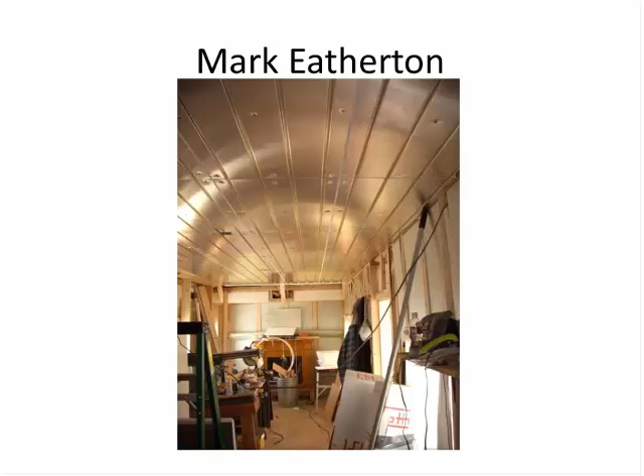Here's a radiant ceiling system that I installed on my own house up in the mountains. This is part of actually getting the tubing installed, and as you can see, it's in a state of disarray, which is typical for a construction site.

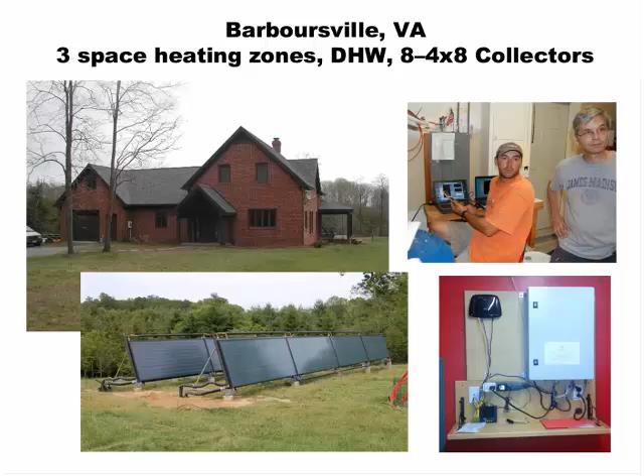We're focusing on smaller buildings because big buildings have had energy management systems available to them for decades. But small buildings have not. Small buildings have sort of missed the energy management revolution. And so we started Solar Logic with the idea that any hydronically heated house could have solar and could have an intelligent energy management system added to it.

And when you have a standard plumbing system, what you find is that you have the ability to control it in a standard way. And so again, with what we provide as far as the technology, the SLIC controller in particular, we don't customize that piece of equipment for your job. We don't do any original programming for every system that we send out. It arrives ready to plug and play, and that's because we do things the same way.

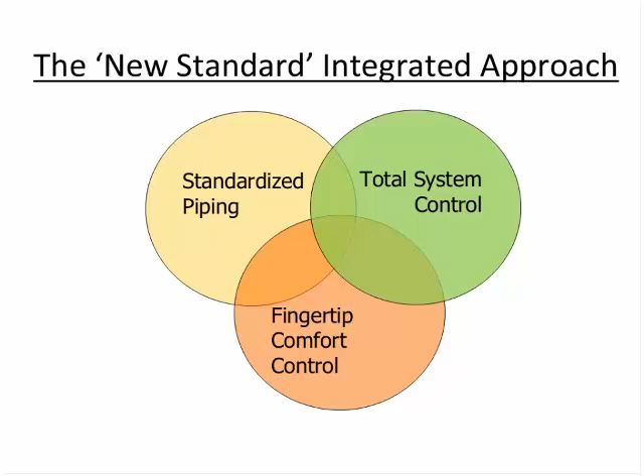First of all, the standard plumbing that we have landed upon. I standardized it for myself and my own work over 15 years ago, I guess. I standardized on always using a primary loop or some kind of hydraulic flow separator. And I've tried both, primary loops and flow separators, and I've decided that for better control and better monitoring, the primary loop actually works better.

So almost always we use a primary loop instead of a flow separator. The primary loop provides the flow separation, but it also provides temperature staging where you can put different temperatures in order along the flow path of the primary loop. So for instance, the solar collectors can, through this heat exchanger, feed a storage tank, which can feed a boiler, and so the temperature goes up and up as you go down the flow path of the primary loop. So you have this rising temperature order for the heat sources, and then you have diminishing temperature order for the heat loads.

So the first heat load we almost always have right next to the boiler on the primary loop where the boiler fluid is the hottest is the domestic hot water tank, so that you can have fast recovery for showers to prevent the occupants from complaining. You always want to do fast recovery for showers at the hottest temperature.

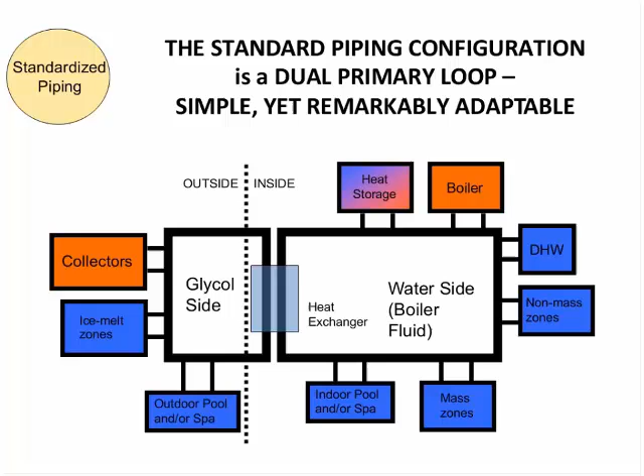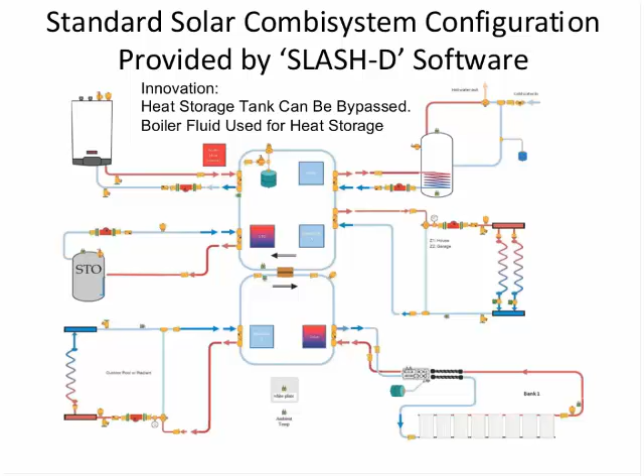So that's how you do the plumbing. That's what we call standardized plumbing, and we make it really easy by giving you free software to help you do it. I'm going to try to advance to the next slide here.

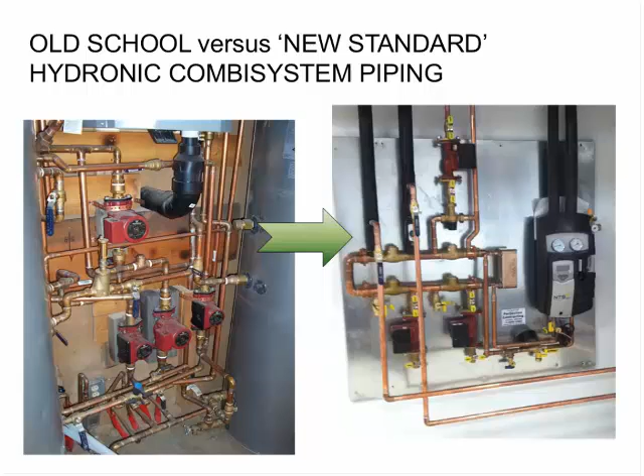And if you do that, then you can control it in a very neat way, and you can guarantee the control is going to work right. So here's the control part of it.

Our controller, we call it the SLIC. It's the Solar Logic Integrated Controller. And we invented it from the ground up starting about 6 years ago. What we did is we took every control item that's usually in a hydronic boiler room and we put it into one box and put all that stuff under computer control in the one box.

So all the wires from the heating system come in through the bottom and connect to screw terminals on the bottom of this box, including the circulator pumps, the motorized zone valves, the end switches, the temperature sensors, which are typically 10K thermistors. All the room thermostats connect to this box. And because everything in the heating system, all the sensors and all the pumps and all the zone valves and all the switches are connected to the box, that means that the computer can see their state.

The computer can see, is the pump on or off? What temperature is the sensor telling me? What is the room thermostat calling for or not calling for? Everything about the heating system is processed by the computer, and then the computer has this intelligent software that decides what to do. If there's free heat, we'll find something that needs free heat and send it there. And if there's auxiliary heat, we'll wait a little bit until the temperature drops a little, and then, okay, we'll fire the auxiliary heat as a last resort.

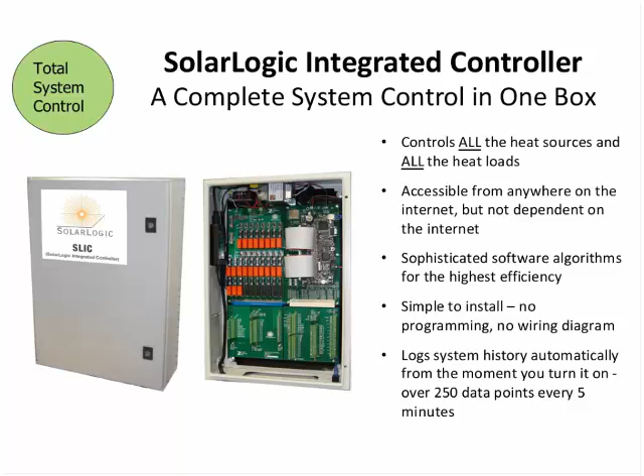All of those intelligent functions are built into the control system. And there's more functions than you can even imagine built into that software. And I'll get into that a little bit later on a later slide.

And our philosophy is that good hydronic plumbing is useless without good controls, and that photo of old school proves the point. Even if you're a good plumber, you can put together plumbing, but if you don't have a control strategy that goes with it, then the plumbing's out of control and it's useless. So we always design the plumbing and the control together, side by side. And our second control philosophy is that the plumbing and controls must be thought of as two sides of the same coin, if you will.

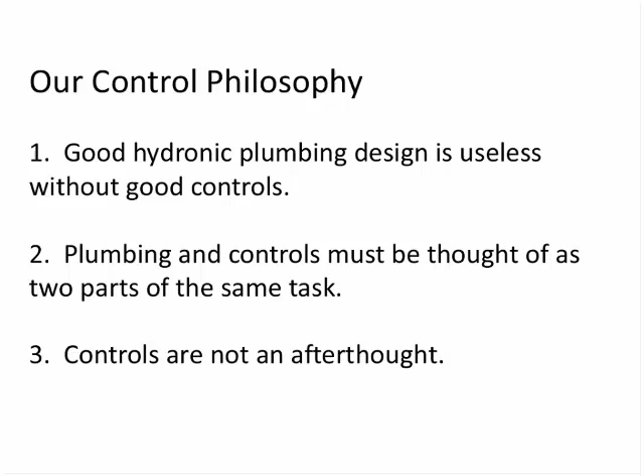And number 3, controls are not an afterthought. Even if you're a good plumber, it's a bad idea to create a complex alternative energy plumbing system, thinking that you'll figure out the controls later as an afterthought. That never works very well.

So if you do standardized plumbing, you can do standardized control. And we have standardized our plumbing and made it simpler by using a primary loop, and we've standardized our control and made it simpler by using a computer and circuit boards rather than the hand wiring that we used to do.

This is one of my really old solar heating controls that I put in a famous movie star's house here in Santa Fe about 10 or 12 years ago. And you can see that there's hundreds and hundreds of hand wiring that is done. Wiring relays together, wiring solar controls and set point controls, and other things, time delays and what have you. In order to get all those intelligent functions, we used to do it manually with wiring and individual controls.

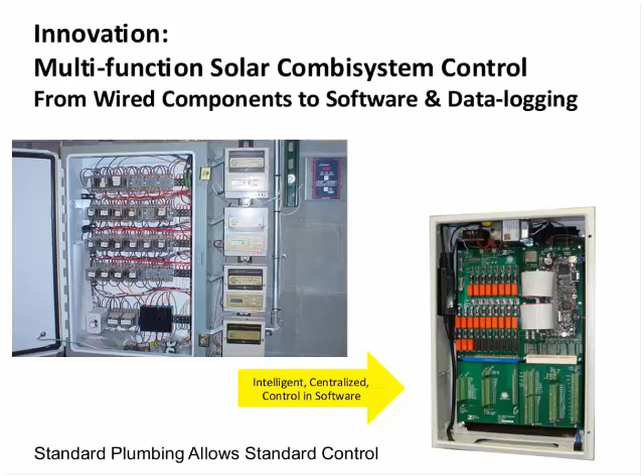And now we built all that intelligence into the computer software. So now it's all done with software. And there's essentially no hand wiring of the internal controls in the box. The only hand wiring is connecting each device to the controller one by one. Each pump gets wired to the control box, each zone valve and each end switch and so forth. So all the wiring is home run to the box. Every device has a place to go, and you put it there in the box.

So here's kind of an overall list. If you listed all the functions that are built into the SLIC controller in its software, it would be many hundreds of functions. But this is the big picture. We do two-stage controlling of almost every temperature in the system. What that means is that every heating load that needs to be heated can have two set points, a little higher when the heat is free and a little lower when the heat's not free. And that's called two-stage thermostat control.

And every device in the standard heating system that we do has at least two stages, so that we can bump it up and store heat by raising the temperature when the heat is free, and reducing the conventional fuel when the heat's not free. Solar and backup for domestic hot water, that's the kind of function that you get from a typical differential thermostat.

We have the equivalent of many differential thermostats built into our software. Solar heat storage in water tanks or in mass floors. Well, most old school solar heating systems had water tanks, but almost no old school solar heating systems even considered the mass of the concrete floors as a storage medium.

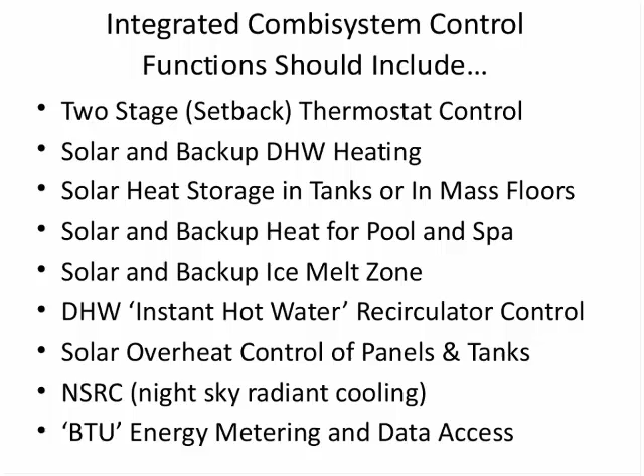And also BTU energy measuring, we measure all the BTUs going into the building from every heat source, and we display it as part of our dashboard display of our control system. And then, of course, the last part of this, Claudia already mentioned, is that for the homeowners or the people who live in the house who are not computer people, you don't have to go to the computer to run the system. You just have to go to the thermostat, turn it up and down.

And then also our thermostats have a few extra functions like a solar-only switch so that you can just not heat the room with anything but solar if you want to, and an auxiliary switch which gives more priority to holding the temperature at a constant level. Say if you have an elderly guest or a sick child or something, you might want to hold the temperature in the room much more constant, and so you use the auxiliary switch to do that.

But the normal function switch on this room thermostat allows the controller to decide the optimum balance between heating the room up to the comfort target temperature or not, or how close to the comfort target temperature it will allow it to go without burning extra conventional fuel.

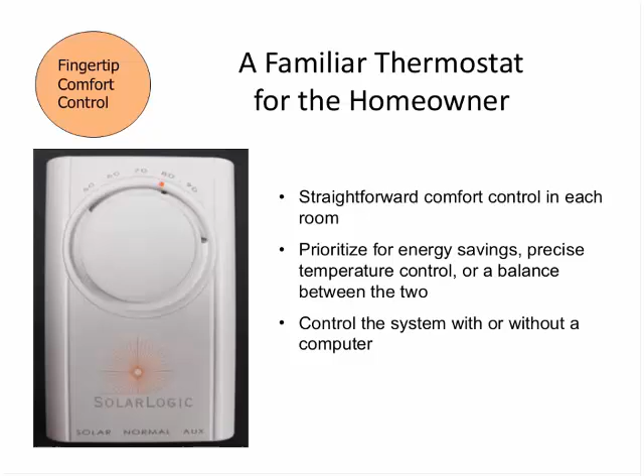And then in the house, the computers that are connected to that network can view the control system as a kind of a dashboard. So you can actually drive the heating system through your computer, kind of like driving a car. But then also the home local area network is often connected to the internet, to the outside, through what we call cyberspace. And when it's connected to the internet, anyone with the right software and the right passwords can also look in on this heating system.

So the installer might want to have the password for a system he installed, and from his office he can check it and make sure it's working right, and do diagnostics and adjustments. And of course, we at Solar Logic do this all the time with all of our systems. We kind of watch over them, and especially when the owner or the installer calls us with questions, we'll go and look at it by remote control over the internet.

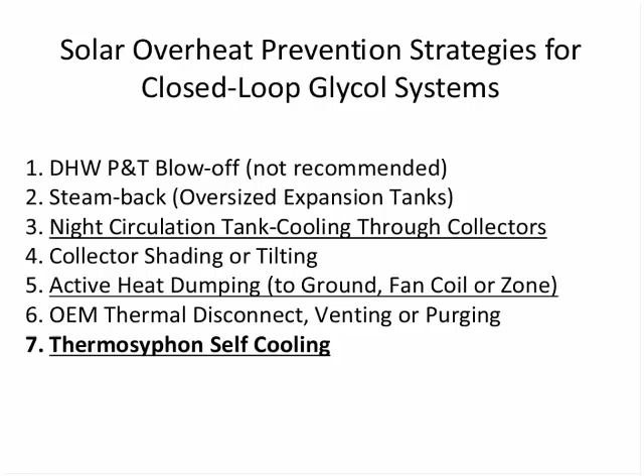You take your collectors and you add cooling fins to the back by connecting them at one corner of your collector array. The corner that's usually capped off, the cap is removed, and the top of the collector has a cooling fin attached to it, and that cooling fin drops behind the collectors at a slight tilt and comes down and connects to the other end of the collectors, where you usually have a cap, through a swing check valve. So let me show you the back of the collectors to make this easier to visualize.

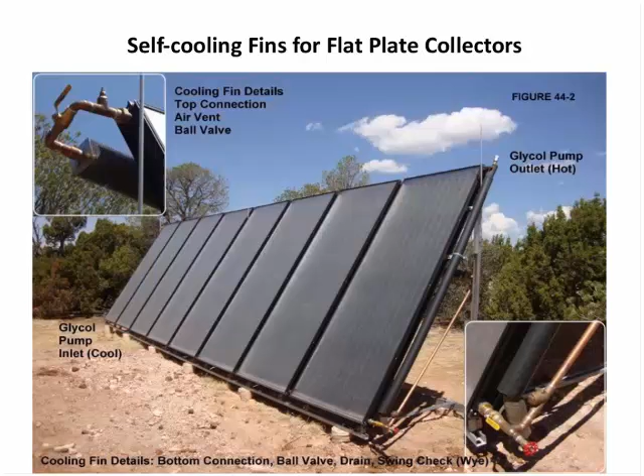You see the fins come off the top of the collector bank and drop down at a tilt downhill all the way to the bottom of the collectors. So when you have a power failure, I'll go back to this, the pump stops, and the pump that was pumping fluid from the bottom of these collectors up and out the right-hand top corner, the pressure from that pump was holding this swing check valve shut.

So there was no flow through the fins while the pump is on. But then when the pump fails or has a power failure, the heat building up in these collectors causes the fluid to rise, because hot fluid is less dense and rises, and so it rises to the top header, and it can't find its way out the right-hand side because the pump's kind of in the way there. So it finds its way out the path of least resistance, which is out the other corner through the fins.

And in the fins is cool fluid, and as hot fluid slides in the top, as it rises and comes in the top, the cold fluid slides downhill and back into the bottom of the collectors. And so that's known as thermosiphoning. The flow from the hot collectors to the cool fins and around is driven by the heat from the sun. It's known as a thermosiphoning cooling loop.

And we use this these days on every system. Just about every system we put in for the last 3 years has had thermosiphoning cooling loops, because it keeps the glycol from boiling during a power failure, and it keeps it cool so that it doesn't wear out prematurely and become too acidic too quickly. And so everything lasts longer and everything stays cooler, and that makes solar heating more reliable. In fact, it makes it 100% reliable if you do it right.

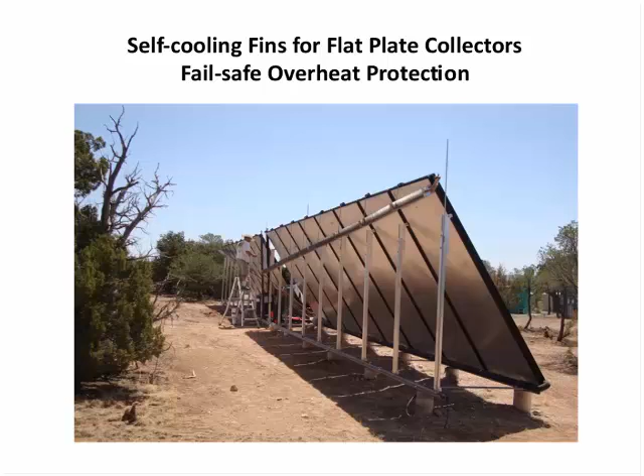So this isn't something that we're experimenting with, and it's not theoretical. We actually do it and it works, and we monitor it and make sure it works. And we can help anybody who's doing solar heating mimic this installation of the cooling fins, because it's not patented or anything. Anybody can do it.

Now let's talk about night sky radiant cooling. The way night sky radiant cooling works is when you put a plate of metal, and here's a plate of metal, for instance, like the license plate of a car or the metal top of your car, and it's clear out at night, even in the summer, what happens is that the night sky becomes a very, very cold heat sink. The equivalent temperature of a dark night sky is 100 degrees below 0 Fahrenheit. I mean, outer space is very cold.

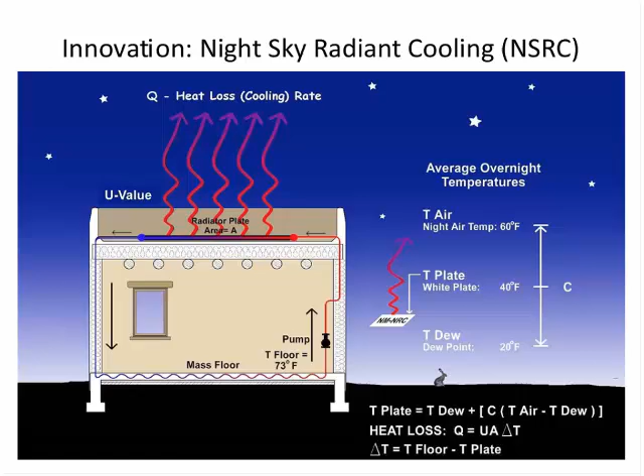And for the price of running a circulator pump, the coefficient of performance for cooling is outrageously high. So that's why we do it. It's economically viable, it's technically viable, and it's just ordinary equipment being used in a different way under cooling control instead of heating control. So let me continue on here.

And then just to prove that you can predict how much cooling will happen in different climates, there is a formula back here on this page. There's a formula here where you can look at the dew point in the weather records at night and the typical air temperature outdoors and the typical air temperature indoors, or that's the fluid temperature indoors. Anyway, with just temperatures and a quick calculation, you can estimate how much cooling you're going to get in almost any climate if you look at the dew point and air temperature records.

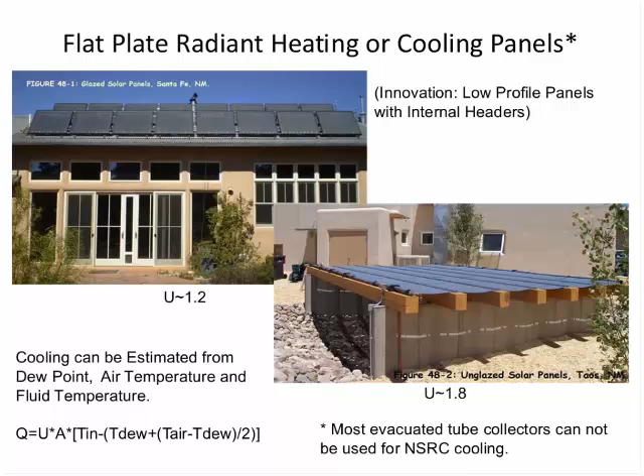They just don't work in Miami, Florida in the middle of summer. Oh, and by the way, you can get plenty of cooling in spring and fall and winter from these flat plate collectors by running them at night.

And that's not such a far-fetched idea if you have a commercial building that needs to be cooled even in the spring and fall, or even in winter some commercial buildings need to be cooled. So it's a source of almost free cooling, and you can use these formulas and some weather data to figure out how much cooling you can get month by month. And pretty much anywhere in the United States, except the most hot and humid places, it does work.

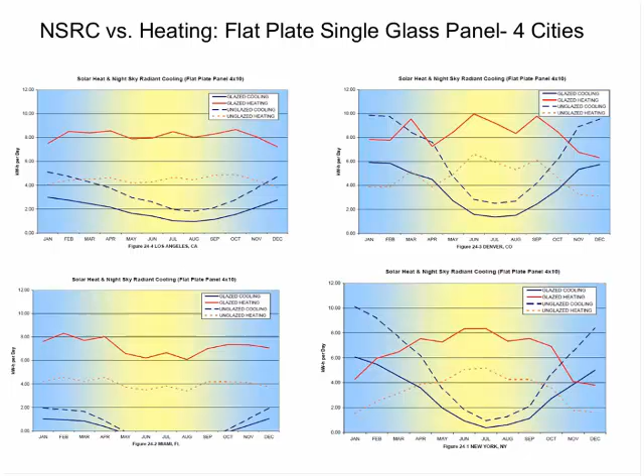So moving right along, here's 6 things that if you're thinking about radiant night sky cooling, you should probably realize. It doesn't work like an air conditioner. It's more like an economizer cycle where you turn it on when you can do it and you turn it off when you can't do it. So it's not on demand like an air conditioner. And that's the most important thing to keep in mind.

It's solar heat in reverse is really what it's like. I mean, when solar is there, you take it and you store it or something. And when radiant cooling is there, you take it and try to store it or use it directly. So it's kind of like solar energy, but it's for cooling. But there's real efficiency advantages. That's the bottom line here.

You can use it anywhere in the United States where the humidity isn't terribly high in summer, and it's got real efficiency advantages. And I've actually figured out the coefficient of performance for some of the radiant night sky cooling systems we have out in the field, and they vary anywhere from a coefficient of performance of like 15 up to 50.

And when you think of a ground source heat pump having a typical coefficient of performance of 3, well, we're doing way better than 3 with radiant night sky cooling. We're doing at least a 13 or a 15, if not better, for coefficient of performance.

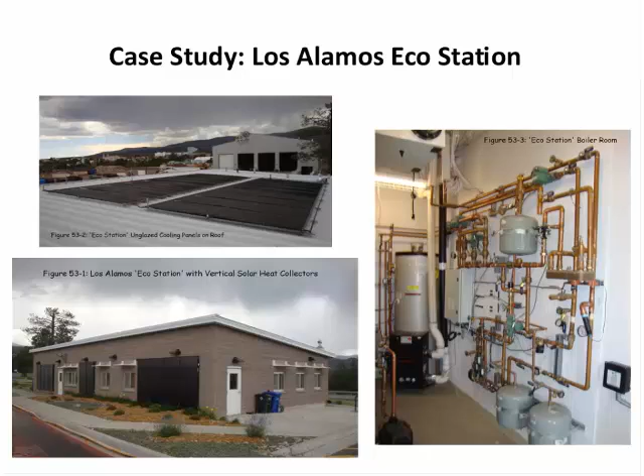And then, of course, we do have actual installations that we monitor and study. And the Los Alamos Eco Station is one of those facilities where they have significant radiant night sky cooling panels. They're quite large, and so they can get a lot of cooling out of them. And now that we have an intelligent control system there, we can watch it over the internet. And this is what happens.

Oh, okay, thank you, Claudia. Yeah, I've been pointing at things with the cursor on my mouse, and apparently you cannot see that, so I'm sorry about that.

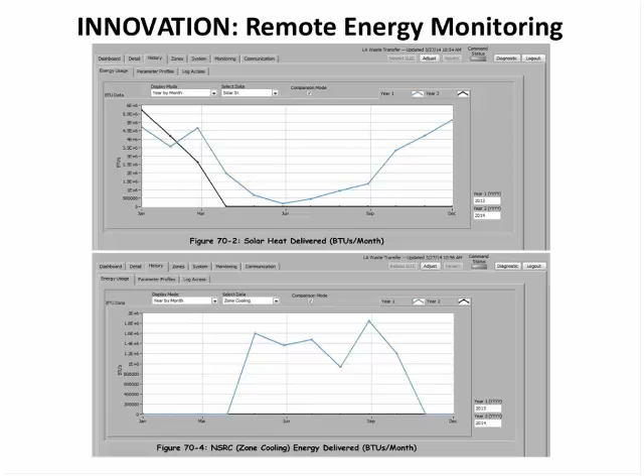So let's just talk about other ways of using this technology that I just described to you. The standard solar hydronic heating system with standard intelligent controls can also be used not just for solar, but for any kind of heat. Any heat that you can use to make hot water and put into your hydronic heating system, we can control it. So here's some examples, and again, this is what we do. I'm not talking theory. We actually do this.

Whenever the heat's there, you use it, and the intelligent control system figures out where to put it, either to store it or to put it in the concrete floors. Or in this case, in Colorado, this is a fish farm, so we put the heat into the 3,000-gallon fish tanks where they're raising fish.

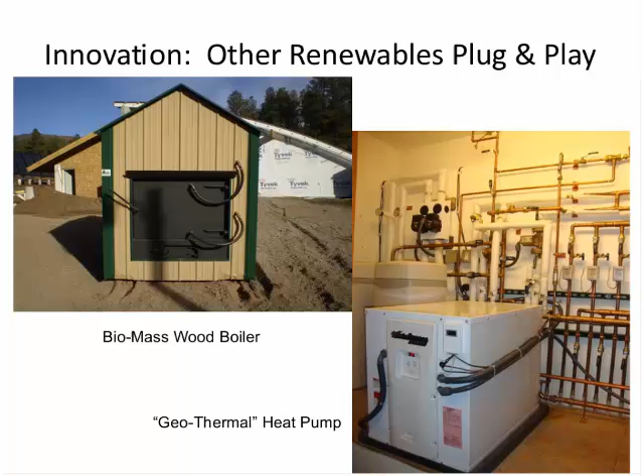So whenever the engine runs, we treat it kind of like it's a solar collector. It's free heat. It's running anyway. It's making heat. So then we tap off the heat and send it around the primary loop, and the intelligent control system just sends it to somewhere it can be used. And this improves the fuel efficiency of an engine generator by a factor of 3.

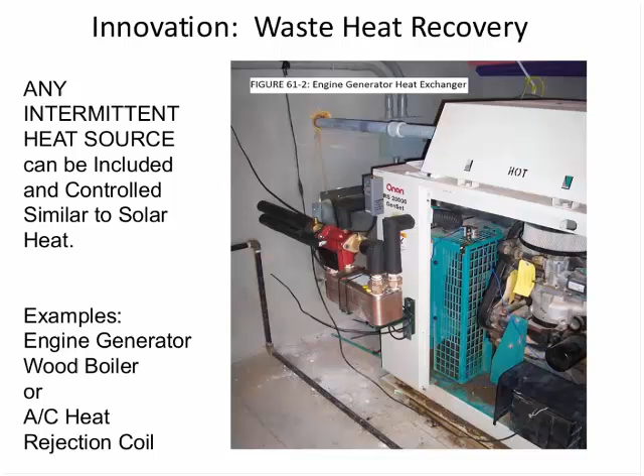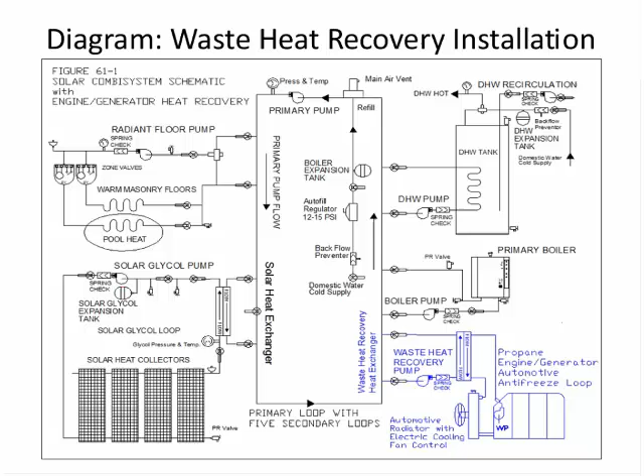So I'm going to bring this part of the presentation to a close with this philosophy, which we use all the time with our alternative energy heating systems, and that is, if you're going to sell alternative energy to the owner of a building, it must be an upgrade. It cannot have anything weird about it. You can't tell the homeowner to throw a tarp over the solar collectors or to turn a valve to make the heat go in the right direction manually or something like that. It must be an upgrade, and so all of our systems are completely reliable, completely automatically controlled and completely verifiable. You can watch them work and verify that they work.

And then the other thing is, not only must it be an upgrade, but it must feel like an upgrade to the homeowner. It's like buying a new car for the homeowner. It's got to feel like it's way better than the hydronic heating system they used to have. And that's our philosophy. So with that, I think that is the last slide in my part of the presentation.

And I'd like to turn this back over to the moderator. Oh, what's his name. Thank you very much for that, Bristol. It's quite obvious that you are a pioneer in the field, and it's evidenced by the arrows that are in your back. Okay, yeah, right, the bleeding edge.

Yes. How many years have you been doing this? I've been doing standard hydronic heating systems in this configuration for about 16 or 17 years, but I've been doing solar heating of all kinds since 1977, or actually since 1975. So that's like 40 years, isn't it? I'm a solar heating guy that's been around for 40 years. Regular guru.